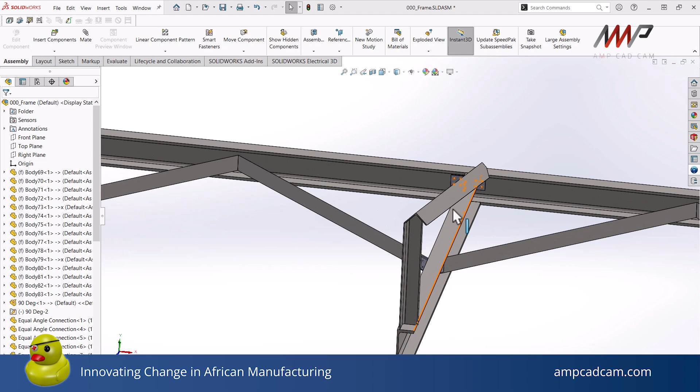In SOLIDWORKS, if you have an assembly where multiple items need to be fastened, you can do so by using the Smart Fastener option. For this, you will need to have SOLIDWORKS Professional or Premium because it makes use of the toolbox library to assemble the fasteners. You'll first be met with a message that the Smart Fasteners will need to make changes to the items that are lightweighted to place them in resolved mode, and this will make use of extra resources.

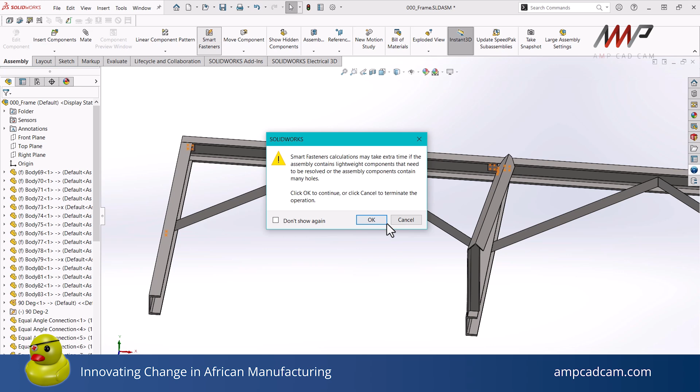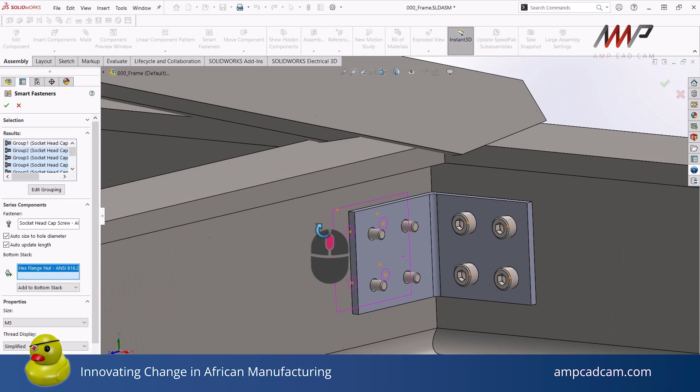Once in the Properties tab, you can choose to add only a few holes or populate all the holes it can find. Once it has collected all the holes, it will then show you per group the selection of bolts. Each group, for example, will be a bolt, washer, and nut. You can change these by adding a top or bottom stack item, extra nuts, extra washers, all depending on the standard item that you use to generate the hole. You can also change the size and length of the fastener that is used.

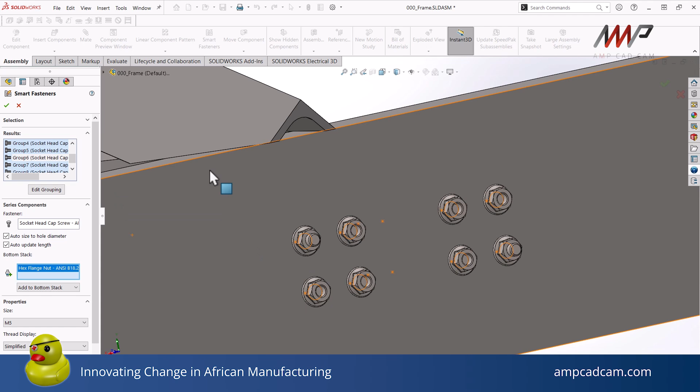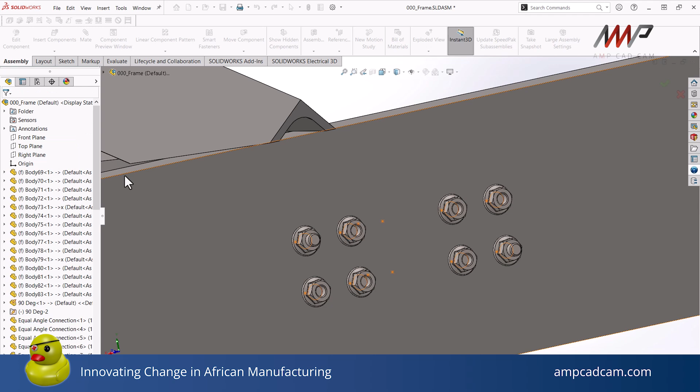If you want, you can also change the type of fastener used by right-clicking on the group and choosing a new fastener type. The fasteners are by default picked based on the type of hole that was generated on part level or an assembly level. And for this, it makes use of the actual Hole Wizard tool or the hole series that was used to generate the holes. Once you've completed the feature and you're happy with all the necessary items that are added, SOLIDWORKS will add all of them to a folder for each group. All these items will then be added to your feature tree.

Now the best practice is to leave fasteners to the very end of your design, and once they've been added, they will slow down the assembly performance. To improve on this, we can do the following. We can add a new configuration. I'm going to add two configurations. One that has all of the fasteners added, and one where all of the fasteners will be suppressed. I'll call them that respectively.

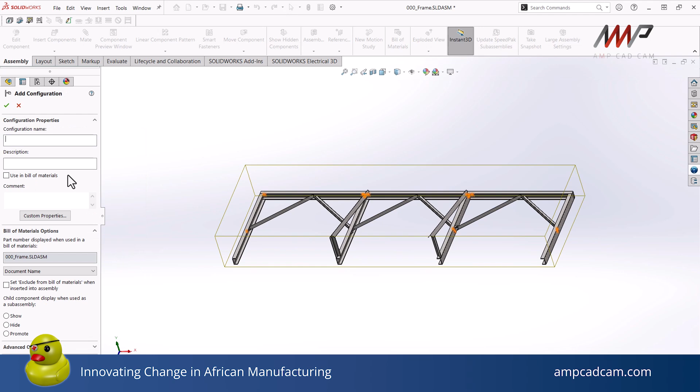Once I've generated my two configurations, I will then make sure to activate the No Fasteners configuration and suppress all the fasteners that were added to that configuration. I will take care to save my assembly with that configuration loaded and active. Then in the future, if I need to open my assembly, I will need to make sure that the No Fasteners configuration is loaded. And because I saved my assembly with that configuration loaded, it should be loaded by default. This will speed the assembly performance up when I use it in the future.

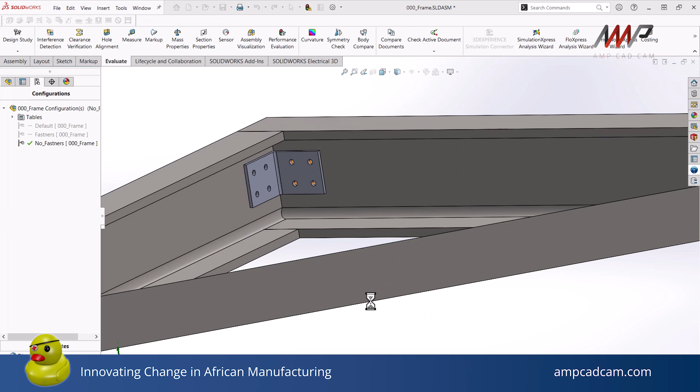And the reason for this is because the fasteners will be excluded from the rebuild cycle because they have been suppressed on the No Fasteners configuration. This is a way that you can improve your assembly performance by removing items that are not necessary on the top level assembly while you're working with that assembly. Thank you for joining this video.